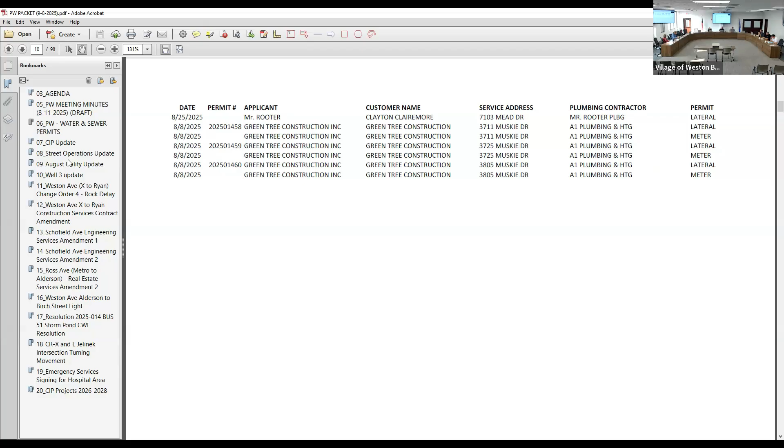Most of these projects are on the agenda in some way, shape or form, but with the weather changing, the biggest item of discussion with all the contractors is making sure we get this done before winter hits. Right now, everything's looking like that should be the case, making sure we get pavement down in October or early November.

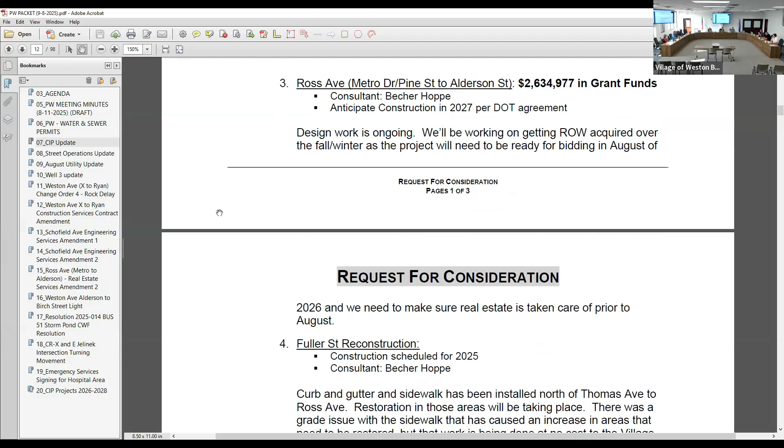For the Ross Ave Metro to Alderson project, we tentatively have a public information meeting scheduled for October 8th. I don't have that on here, I can send that out too. It's not necessarily a public works meeting, but a meeting for the businesses and residents along that corridor to go over the project with them. I think there may even be somebody from the DOT since that one has STP funding associated with it.

Fuller Street project is ongoing. If you walk through there, you might notice on the west side the sidewalk is a little high in some areas, it got put in a couple inches high in some spots. We're looking at the contractor figuring out the method they want to use to make sure everything flows back to the road.

So whether that be having their concrete sub rip out all the sidewalk and redo it, or attempting to restore back a little further into the yards to make sure everything will still flow over the sidewalk. If you go through there, you might notice restoration is a little further back than typical in areas, but that's kind of their choice. Any work over planned quantity for that restoration is at the contractor's cost, not the village's.

Have they found all the bad spots? Are there gonna be areas they'll have to do something else behind there? There might be still, I think there's maybe two where there really isn't. Are they gonna redo the sidewalk? Might be a combination of one of each.

So I think for the most part they can get it to drain across the sidewalk like it should. I thought it looked nice, they did a good job on it, looks good with the curb also. So if you go through there, if you hear something from a resident, that's there, but it's not the village's cost to remedy it.

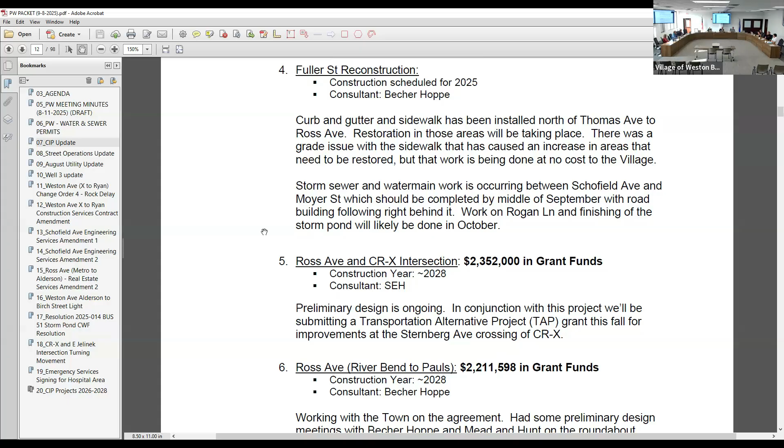If it was up to us, we could just say rip it all out and redo it all, but I think whatever, probably close to 1,000 feet of sidewalk, they probably don't want to rip out. But it should all work, and before we approve it, we'll make sure it is what it should be.

Biz 51 pond, I got that in the packet, but we've got a couple items to get together for the Clean Water Fund loan before the end of the month for that one.

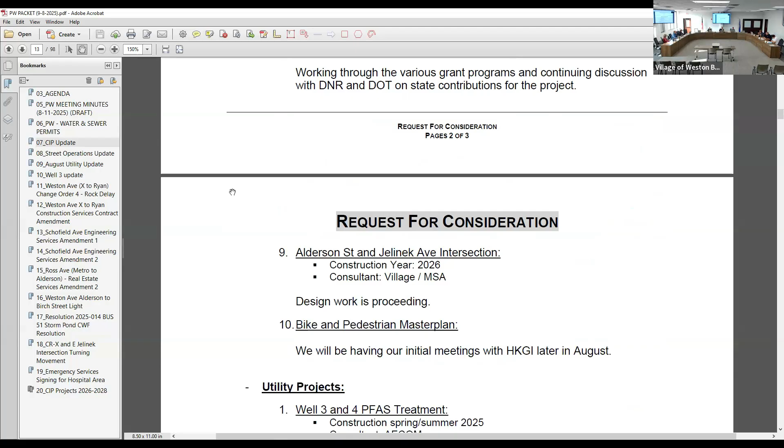And the bike and ped master plan is underway now as of the end of August. We had an article in the newsletter about that, and we'll be working on getting additional information out to the public there.

And then the GAC tanks, well, I won't steal Josh's thunder, I'll let him talk about the well 3 and 4 work.

I added a bunch more information to this table here, and I'll try to, if you have any questions about the projects, just trying to track kind of where we're at with cost to date on them and any special notes. If you've got questions, let me know. Otherwise, any questions for Michael? No.

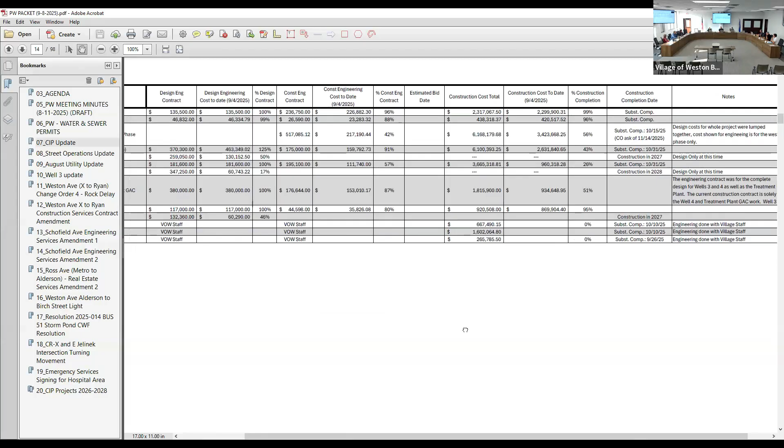Item number 8, street operations update.

First off, we had grading of the gravel roads throughout the village. We also purchased some calcium chloride to mix together and put down for residents on these roads. We applied a coat of calcium chloride for dust control after the roads were graded.

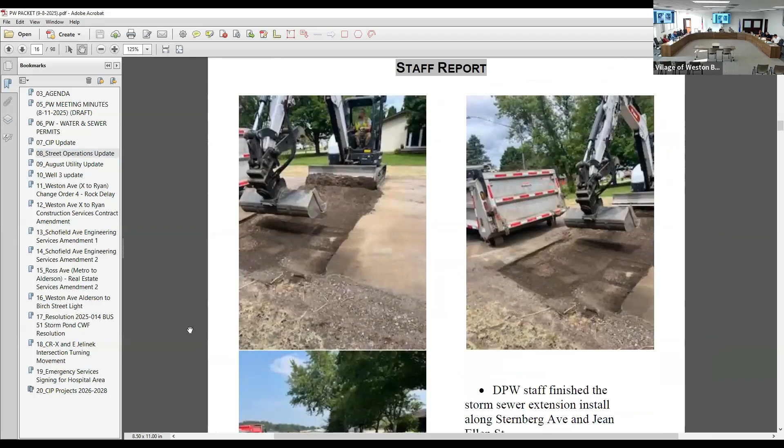We finished the storm sewer install on Sternberg and Jean Ellen, which included putting in 10 Nyloplast storm structures, 1,800 feet of pipe, and reshaping the ditches and hydroseeding everything back in, getting it ready for the overlays.

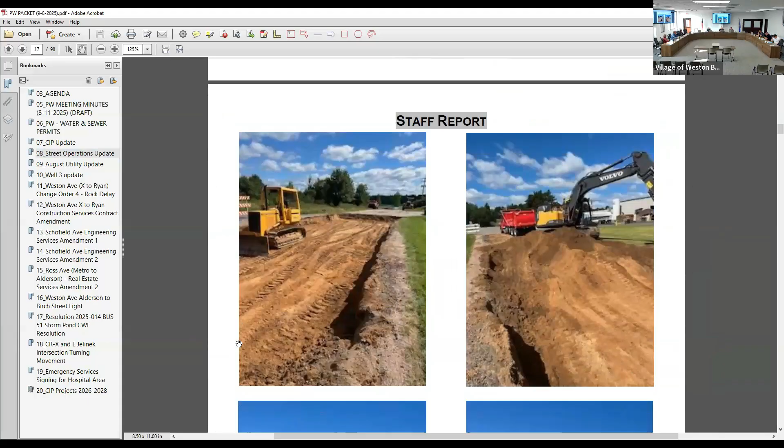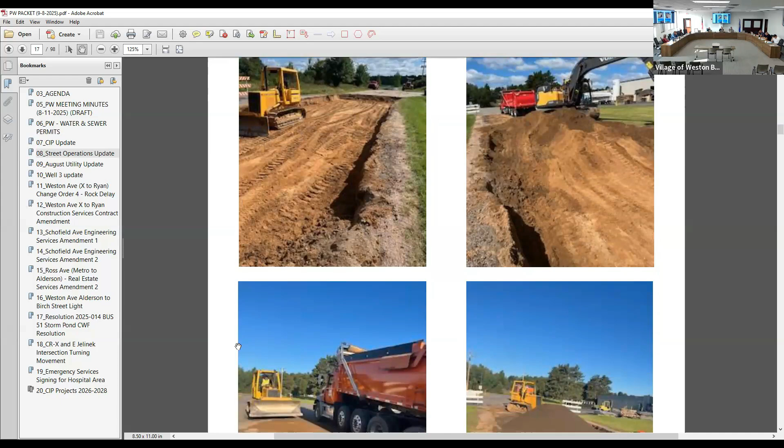We also did an excavation on Meridian Street. The crews excavated 2 feet of material out from the road. The top gravel grade was granite, about 6 inches. Under the granite was about a foot or so of topsoil, but we needed to get a good sand base excavated out, put a sand lift back in, and a 12-inch recycled base course for the grade.

The excavation was about 125 feet long. The reason for this spot was right in front of the business where there's a lot of truck traffic coming in and out, and the road was getting deteriorated pretty bad there.

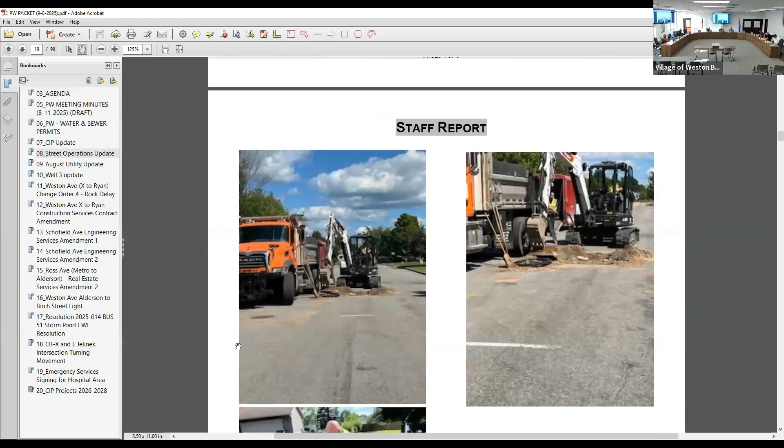Crews are also finishing up on the manhole water valve adjustment overlay projects. They've got 3 guys on it doing all the adjustments. They're doing about 6 manholes a day, start to finish - dig them up, pave them, set them back, and repave them in.

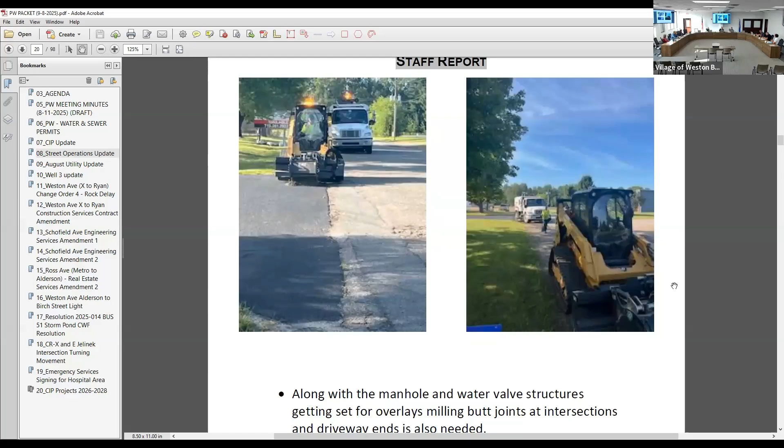Along with that, the crews are also doing the milling of driveways and intersections. Two personnel are involved with that. Millings are picked up with the street sweeper. We also haul those back and it goes right onto our recycled blacktop pile.

We also got some more line painting done, signal painting over off of Schofield Avenue where the GSP was applied. The pavement markings were by the school and the industrial park entrance. They needed to be redone, so staff got that done before school got in session.

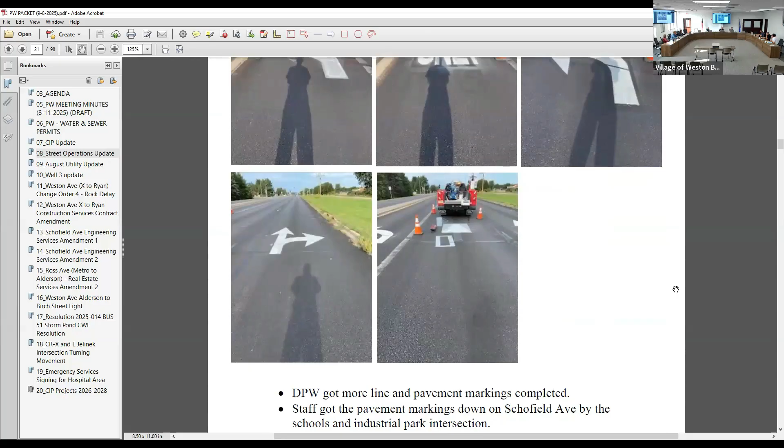And for the shop, all the leaf vacs were in along with the trucks they mount up to for service and repairs. They finished fabricating the plow wing, replaced with thicker steel and gussets for reinforcements.

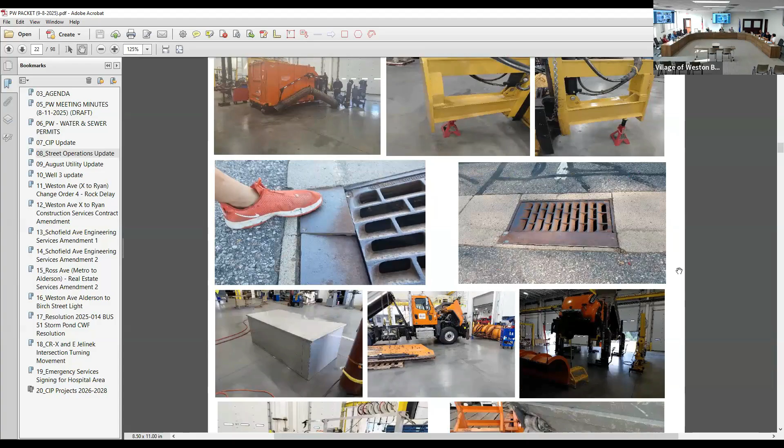We also repaired a cast iron inlet on Ross Avenue. They fabricated a stainless steel box for Schofield Avenue irrigation mechanicals. The box was wrapped in a vinyl flat green so there's no reflection as people are driving by on Schofield Avenue. The old box was rotted out and rusted, so they made the new one out of aluminum and stainless steel.

There was also a fabrication of a rack to put our 8-foot barricades on the truck. It's being mounted to the back of the truck. They're also adding stoplights, turn signals, and emergency lights on it so you can see it, because the signs will be covering up the taillights on the truck itself.

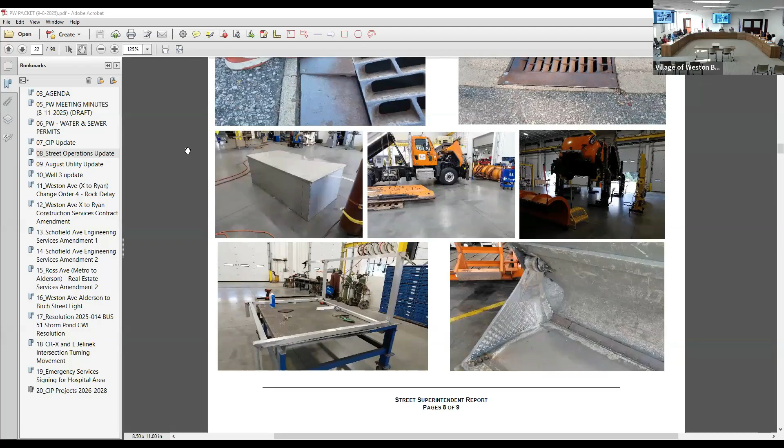They finished up the fabrications on the 4-in-1 bucket. Also, not pictured, they did our quad axle number 90 AT repairs, the Flail Mower drum replacement bearings, number 15 triaxle replaced oil cooler and service, number 38 front end loader service, shop compressor service, and hose reels in the shop were repaired. The overhead crane was inspected by Custom Steel and shop lifts inspected by Waltz Patrol.

That's it. Anything for Forrest?

Awesome. Thank you, and I really appreciate the work you guys do fabricating some of these things. Obviously, if we were to go out and buy a metal box for something, it would be pretty expensive. Yeah, so it's nice that we can do some of that stuff in-house. Absolutely. So, those pavement markings look good. Yeah, I had my drive by when he was doing them, and they look really good. He does a good job on those. Yes, absolutely.

I'll just say the long line painting should be getting done next week, Friday, with Portage County. We've been working with Portage County Highway Department the last few years to do our long line painting, which is at a considerably less cost than some of the private entities out there. So we're doing more of the regular pavement markings - we'll do the specialties, the arrows, the words, the crosswalks, those things - and then the truck that just goes for 2 miles down Schofield Ave, that gets contracted out.

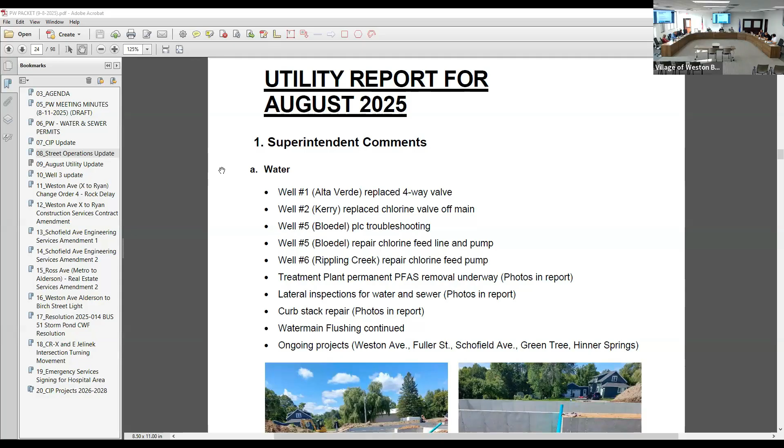We do have a finish line schedule for our well 4 and the permanent tank portion of this project. You can see in the pictures, the tanks got delivered. It was a tight squeeze getting it through the door, maybe about 1 inch or 2 on either side, but we got it in.

The tank outsides were painted. We had some discussions on colors, and green is for our raw water that has not gone through any of the granular activated carbon material. Anything beyond that in the treatment plant will have a blue color.

On the schedule, I believe next week we should have municipal well out to do some of the work on the pumps in well 4. We need a rehab, and the pumps needed to be rebuilt as well. Midweek, the tanks will be getting disinfected, with an anticipated GAC delivery the 22nd.

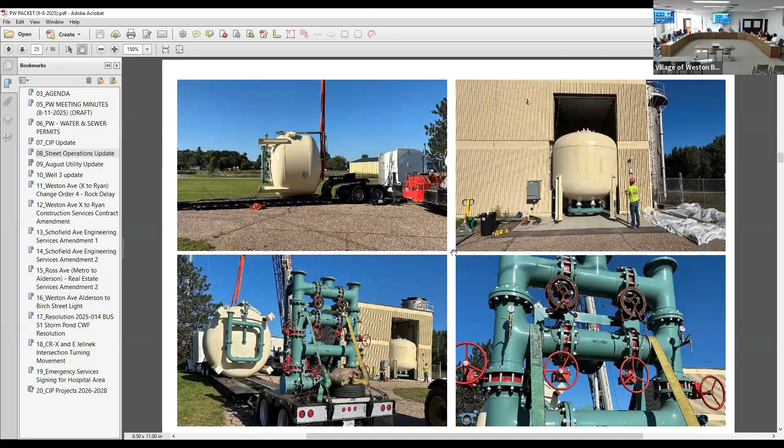I don't believe that's changed since Friday. I didn't get a chance to get out there today to take a look at it. I don't know if we have a meeting scheduled, but I think we'll need one to go over what the startup of this is going to look like, when it's going to be, and what boxes we have to check. I can't remember exactly what the DNR said, but I believe they wanted to come up to be part of something. So we need to get a meeting on the books to go through what the startup's going to look like for well 4.

On the well number 3 side, the bid opening for that portion of the project is tomorrow afternoon, so we'll get an idea of the costs. I don't think we'll be able to start it all this year, but maybe by early winter they could start some of the well 3 portion.

Outside of our treatment plant work, on the water side, a number of lateral inspections are happening for our water and sewer inspections with the guys, along with a couple of curb stop repairs. I included a photo of that as well.

Water main flushing continues. We completed this, I think it was last month, maybe. We finished the east portion of the system, east of Camp Phillips. The guys revalved and are going to be working, heading into the western portion of the village system.

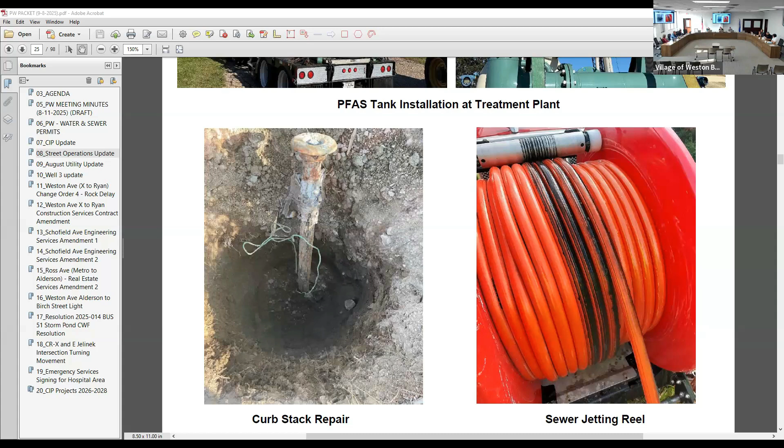On the sewer side of things, we had a demo of a lift truck that we're hoping will work to lift some of our heavier pumps. It seemed to work well, so we'll see what Brian decides on that.

Our sewer jetting continued. I included one photo there of the reel - sometimes when they pull it back, you can get all kinds of different colors as you're cleaning out the sewers.

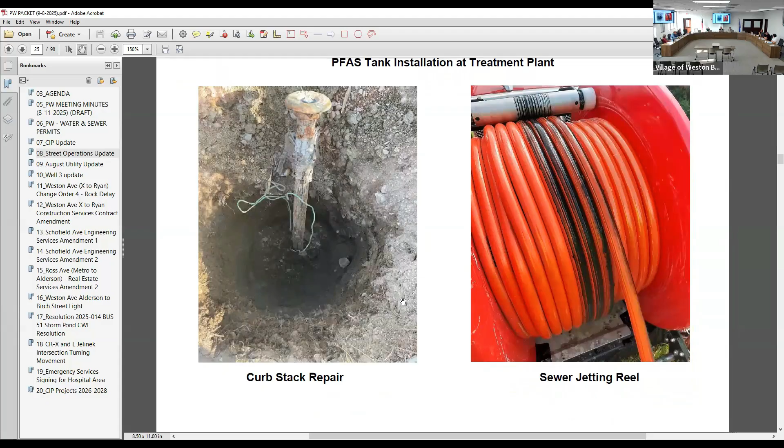We did our regular maintenance, collecting some of our pH data, cleaning our bad spots, and maintaining some of our generator stuff.

For the SCADA project, we had some final meetings with the designer and implementer. We got a draft site report from the designer and we're going to go over it to see what other comments he had, and see if we need our implementer to do anything in addition. It seems most stuff is functioning as we expect.

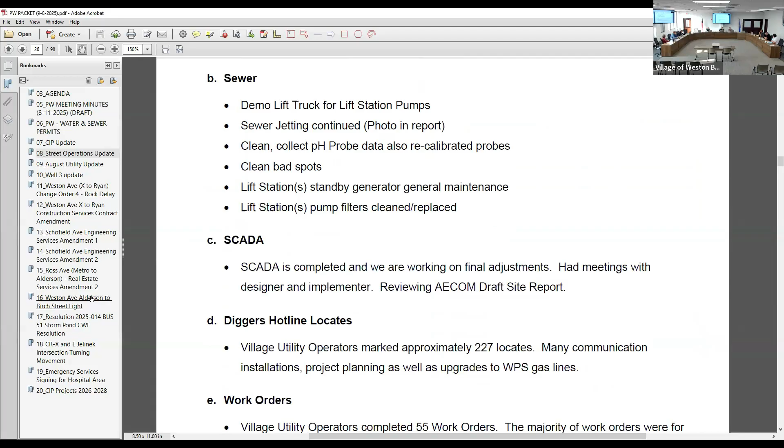Locates - still a bunch of them. Work orders - still a bunch of them, on our contract side of stuff.

Part of our PFAS project - we had submitted a couple, not claims, but as part of our class actions with 3M and DuPont, we got our second payment. It was just over about $850,000 for the second deposit into our account. We haven't heard yet on the other one.

Who's the other one? 3M? Oh no, so that was 3M, 3M, DuPont, and then we haven't... BASF and Tyco. They haven't finalized the BASF and Tyco ones yet, so we don't know exactly where that's going to be. It won't be quite as much as this, I assume, but we haven't heard anything on that.

Yeah, so those are just the 3M deposits. So the first deposit was 3M, this was just the 3M, so we still have fully whatever we're going to be getting from the DuPont portion, and then in addition, whatever they finalize for the BASF and Tyco. So hopefully lots more to come for us.

Well, 7 and 8, I could probably take that off of here. It seems to be running. I hesitate to take it off. Otherwise, we're going to jinx ourselves here.

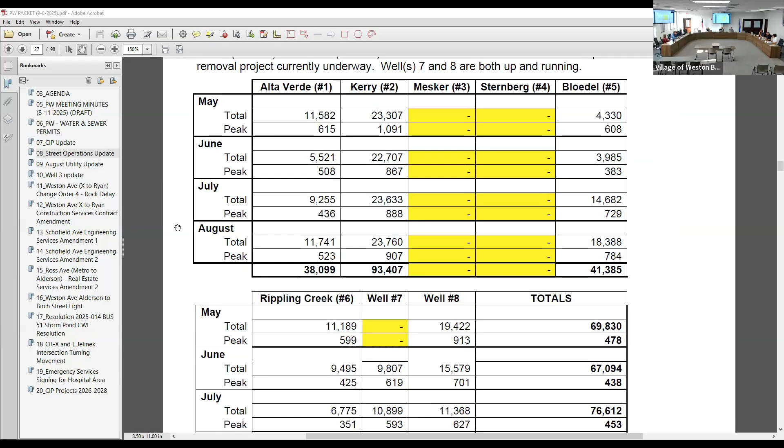I did mention our SCADA project, mentioned the street stuff. I guess the only thing in addition to what I haven't spoken about already is UCMR 5, our second round of samples were collected. Since wells 3 and 4 are off, we couldn't collect those samples. We do have a 5 to 7 month window though to collect any additional sampling for this UCMR 5. So I'm assuming we'll be able to grab something from well 4. I'm not sure well 3's project is going to be done in time to hit the window for the sampling period, so that one might not be included with the sample information. And then beyond that, we have our customers added, our water pumped, wastewater flow data, and our lift station information.

Any comments or questions for Josh?

The money that we are being allocated from the settlement, is that, I guess, being allocated toward anything right now, or is it just going into an account until we... Yeah, I think Mike can speak on it, but now that we're getting our tanks in and we're going to have our first purchase of our GAC material, we'll start being able to see what it costs to get new material, what it is to dispose of material.

So I think we're hoping to utilize it for that. In talking with Jessica, I was trying to create our own designated PFAS account so that, because there will be additional treatment costs for media disposal and new media fills, the goal would be to keep that money in its own account, and hopefully there's enough where we can earn interest income on it so that it can hopefully, maybe not 100% pay for itself, but it can maybe last us the next 20, 25 years, versus spending it right now and then all of a sudden we have to say, oh whoops, now we need to go get a rate increase because our operating costs are going to be higher. So I know she was looking into what some of the PSC rules are on that, to keep money aside for operations, because you have to account for your operations and that's how your rates are determined. So she was going to see how to make it so that this fund is for this part of operations, instead of the PSC looking at our report and saying, hey wait, something seems off.

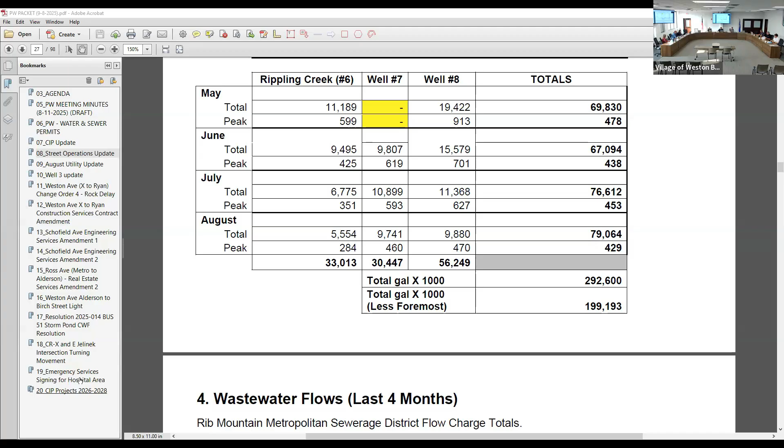We'll go on to policy discussions and recommendations. Item number 10, well 3 iron, manganese and PFAS treatment project bid status. Can I make a slight ask that we move number 19 up? Sure. Okay, yeah, let's jump to item number 19, emergency services signing for hospital area.

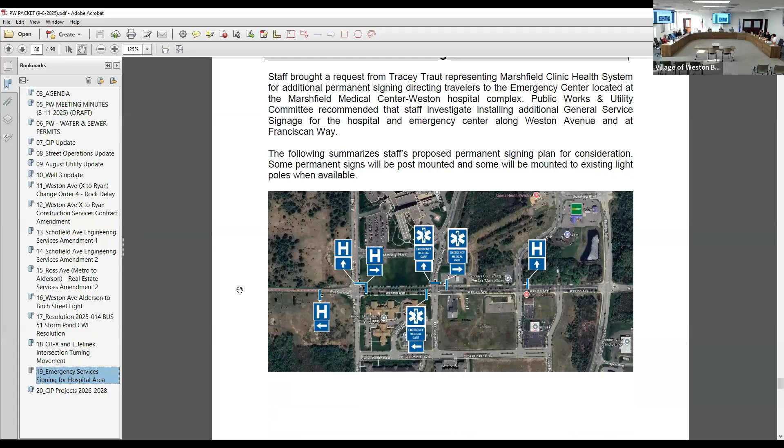So it's kind of a follow-up from last meeting, and Ike wasn't here at the last meeting. He's the one that's been in main contact with the hospital area, so I know he put this schematic together. I want to make sure that's the way the committee was thinking we would sign this, or if there's other thoughts.

Yeah, so essentially whenever Marathon County did improvements on Camp Phillips, they threw up a hospital sign just off the intersection of Weston Avenue and Camp Phillips. After that, there's no more after that point.

So reading or listening to the recording from the last meeting, it sounded like they may want us to take a look at adding additional signs. This is just a preliminary draft. If we want to take some out, we can just leave the emergency ones that were the original ask.

Once you get into the complex, like Michael mentioned during that meeting, there are wayfinding signs that Marshfield Clinic maintains on their property along Ministry, Cranberry, and Birch, showing people where to go. It's just coming in off of Weston Avenue. There's not much there, so this is just showing either direction.

For example, on the left side there at Birch, straight in going to the hospital, and right and left turns from either direction. Then when you get to Franciscan, right or left turns, along with a sign at that intersection saying straight in is the emergency service area. And then just one advanced sign at Stone Ridge saying hospital straight ahead.

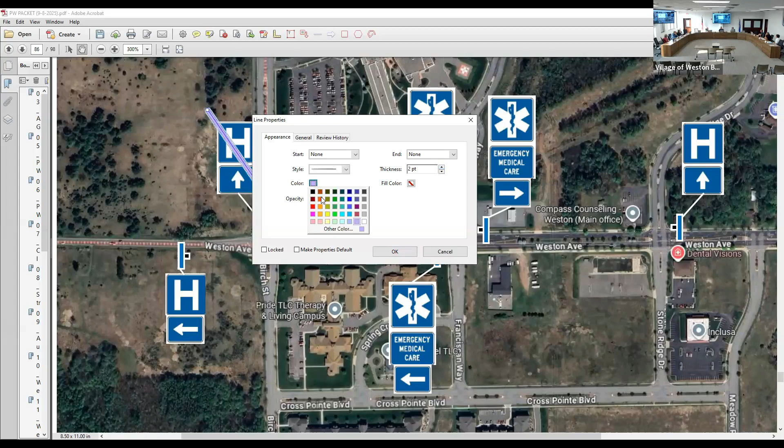And the biggest problem with signing is when they go up, everyone sees them, and after that, they ignore them. Drive around the village, we got thousands of signs that say children playing, you see it one time and it just seems like almost too much. I think we got rid of all the children at play signs, actually, we just had that conversation. I don't have any of those.

So Tom, you're saying get rid of those two, correct? Yeah, I wouldn't think those, I mean, yeah. Somebody, if you don't want them on at all on Weston Avenue, the emergency ones, I think are right where they should be. If anything, that one that goes up Franciscan could go a little further to the north maybe, but still, I think those are fine.

I would almost argue, and obviously we can do whatever we want, but I would almost argue that the one that's on Weston to the west of Birch is somewhat unnecessary as well, because you're gonna end up reaching that next intersection regardless if you're coming eastbound, and from there you can see the hospital, and you should be able to see some of these other signs as well. So I get the one on Weston Ave to the east there because it's a little bit longer of a stretch, and somebody might come off and be like, I don't see a hospital, I don't see anything. But then once they get to that next intersection, there's the 3 EMS or emergency medical care signs, and from there it should be pretty obvious where you need to go.

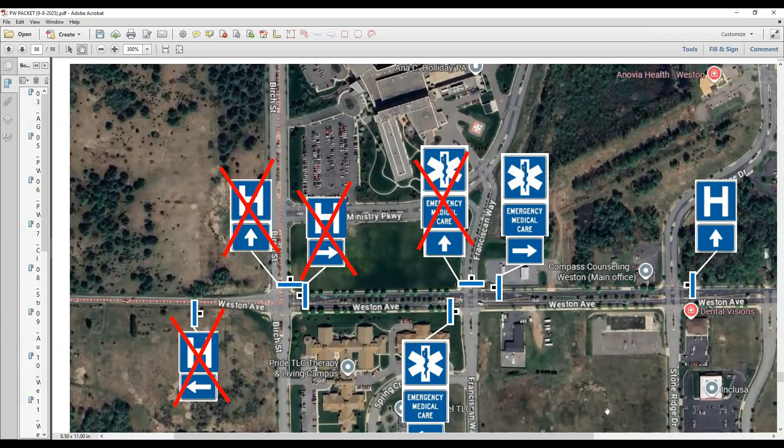I'll recommend the village board proceed with the revised permanent signage layout for around the Marshfield Medical Center in Weston. I'll second that motion. Any discussion? All right, all those in favor say aye. Opposed? I'm sorry Joe, was that a yes or a no? That's an aye. Motion passes, and I'm an aye on that as well. Thank you, all right, that was item 19.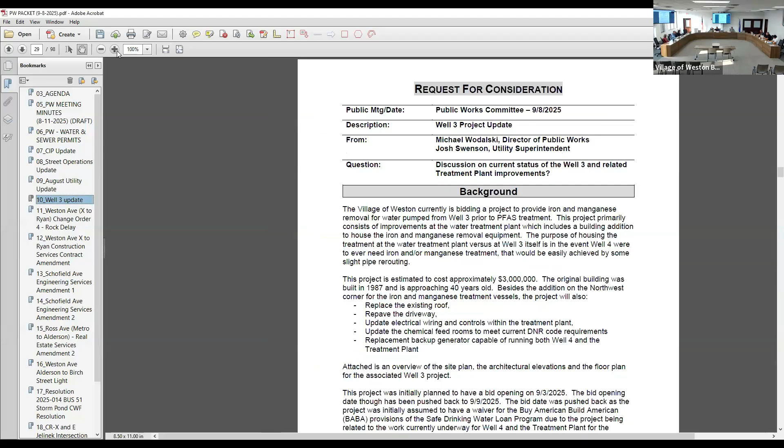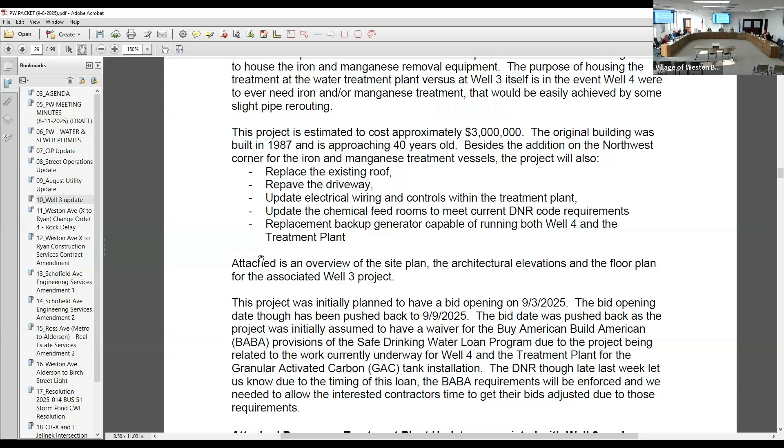Item number 10, well 3 iron manganese and PFAS treatment project bid status. As Josh alluded to, the well 3 bid opening is tomorrow. It was initially scheduled for a week ago. There were some items that came up late during the DNR review, where we thought we were still able to work under a waiver we had for the Build America Buy American provisions of the Safe Drinking Water Loan that we currently have for the well 4 and treatment plant work. However, the DNR got back to us late last week saying their interpretation of the rules is that we are not able to request that waiver, so those Build America Buy American requirements will be enforced. So we need to allow the contractors more than a day to update their quotes, and those bids are due tomorrow instead of last week. But I thought it'd be good to go over the building itself and its purpose. We refer to this as the well 3 work, which is a little confusing because all the work for the most part is taking place at the treatment plant.

But it's to treat the water from well 3 for iron and manganese, which is required prior to the GAC treatment for PFAS removal. So long story short, that's why we had to take well 3 out of the well 4 and treatment plant project, because we had to prove that iron manganese was part of the PFAS treatment cycle in order to get the emerging contaminant funding, which is why we thought the waiver was still applicable, but the DNR said no.

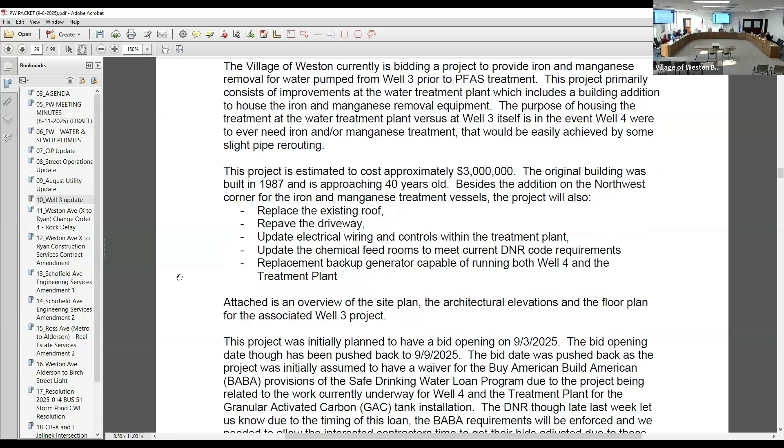Overall, the work at the treatment plant for well 3 is expected to cost about $3 million. This building is nearing 40 years old, and we'll have an addition put on the northwest corner for iron manganese treatment vessels. Along with that, we're looking at replacing the existing roof, repaving the driveway, and updating a lot of the electrical wiring and controls within the treatment plant. Some of it no longer meets current code, so we're getting that electrical area into its own room instead of within some of the other working areas of the facility. We're also getting the chemical feed rooms up to code, and then getting a backup generator that would operate both well 4 and the treatment plant.

So I guess the fun part, as far as the site goes - I don't even know, I probably should include, does everybody know where the treatment plant is? I probably should start with that.

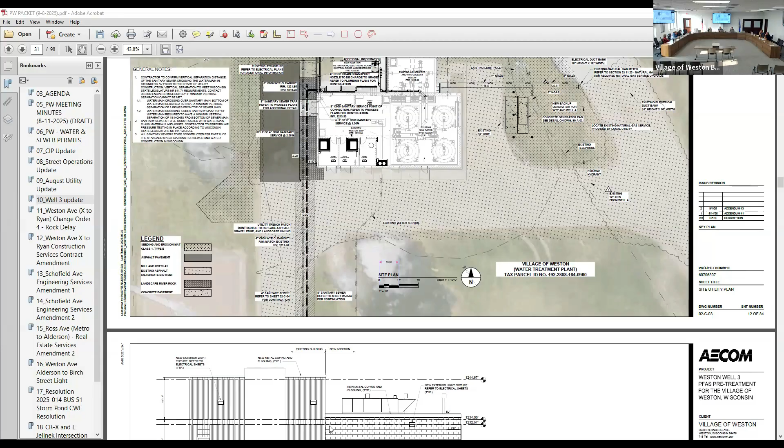So within the facility, in the existing space, these 4 tanks here represent the granular activated carbon tanks, which are currently getting installed. Here we have an air stripper that was installed back in the 80s for VOC removal, volatile organic compound removal. And then this was kind of the chemical feed room. We had all the SCADA controls, electrical controls, as well as an office in a room here.

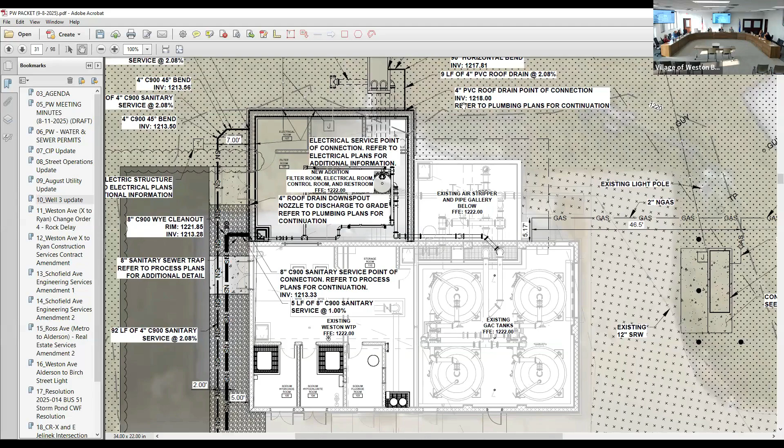So as part of the updates, we'll be adding this northwest corner onto the building to house the iron manganese removal, which I guess zooming in on that - we've planned for 6 vessels initially there. 4 of those, or all 6 of these, are from the temporary treatment we had for PFAS, or do we have 4? I think we had 4. We have to get 2 more.

So then we'll add a restroom there for staff to use if they're there. The control room and electrical rooms will be separated now. And then the rest of these chemical feed rooms will be updated to meet current DNR requirements, with the carbon tanks over here.

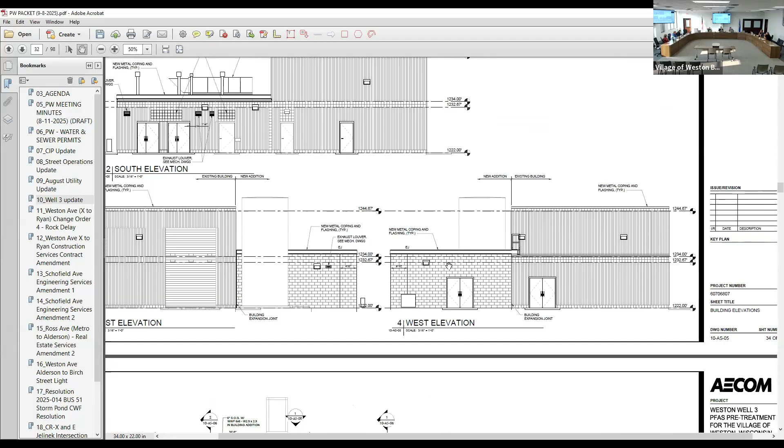And then, as an elevation or architectural view, it'll still be kind of a brick facade, sticking off the west end, trying to match that lower roof line that currently exists, as it is a 2-tier. So from the front, there's not a whole lot - we have a couple louvers and airflow additions, but for the most part, that roof line is staying the same on the south side. Then from the north, you'll see the bump out added, and on the east and west elevations, you'll see the brick building jut out there.

Oh, I don't know if there are any other questions.

Boys, this will come back at the next meeting. Yeah, we'll at least get the bid results. I'll see how quickly we have to turn it around for the safe drinking water loan. We might need the board to take action on bid results.

But we will be submitting the safe drinking water loan for the emerging contaminants portion. $3.5 million is generally what's been allocated to all municipal utilities for PFAS removal. The well 4 work currently should leave us with still probably about $2 million worth of the principal forgiveness there for that work.

So you didn't need anything else from us today? No, just figured I should let you know what's going on. Any other comments for Michael on that one?

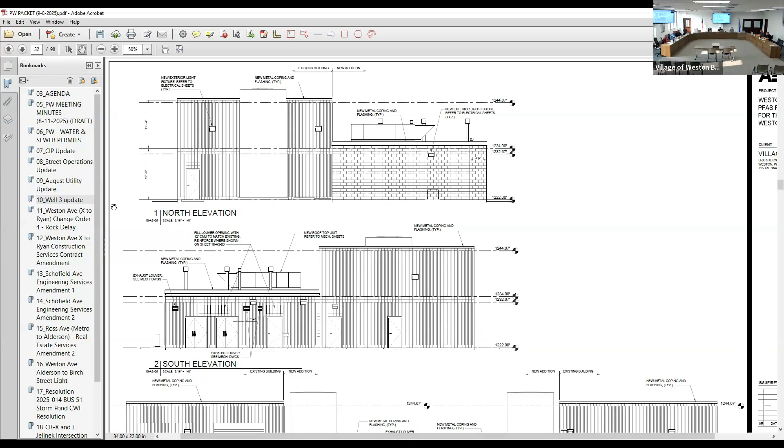All right. Item 11, Weston Avenue, Highway X to Ryan, construction change order number 4.

So this is the construction change order for a time extension for integrity grading excavating on the Weston Avenue project. Kind of a summary of the previous change orders, which are generally more for material type or construction methods. This one is an ask of a time extension due to rock that's been encountered, primarily with the sanitary sewer installation.

You know, you try to plan ahead and get borings ahead of time. And it seems like most of these rock shelves are starting within 50 feet of where one of those borings was, but we didn't quite hit it. Then it goes for a couple hundred feet and stops short before where the next boring was. So they've hit 3 spots.

The first one they kind of dug through. The second one, they had some Swiss cheesing, or drilling, of the rock. And this third spot they've hit really hasn't been something they've been able to get through. Their production has dropped to maybe 20 to 40 feet a day as they try to chisel through the rock, versus about 300 feet a day when there's nothing in the way.

So I guess in reality, this would be a differing site condition. I don't know if we have much contractually where we could truly deny it. But I mean, they have been trying to work through it as best they could.

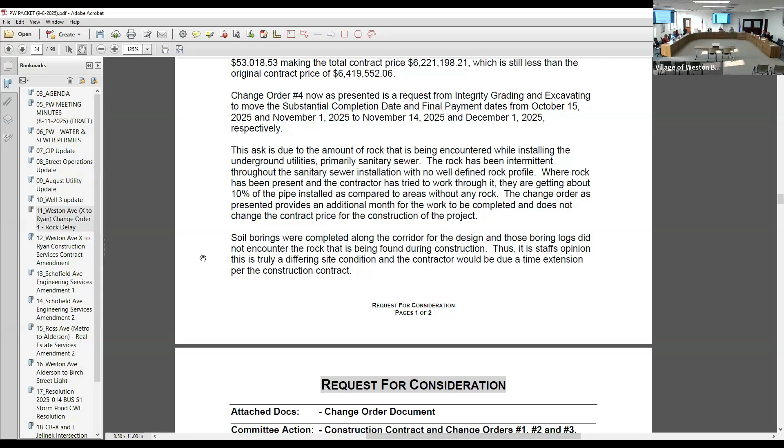Discussion? Do I have a motion? So moved. Motion by Fred, I'll second. Second by Tom. Any discussion? All those in favor say aye. Aye. Aye. Aye. Opposed? Motion passes.

Item number 12, Weston Avenue Highway X to Ryan Construction Services Contract Amendment.

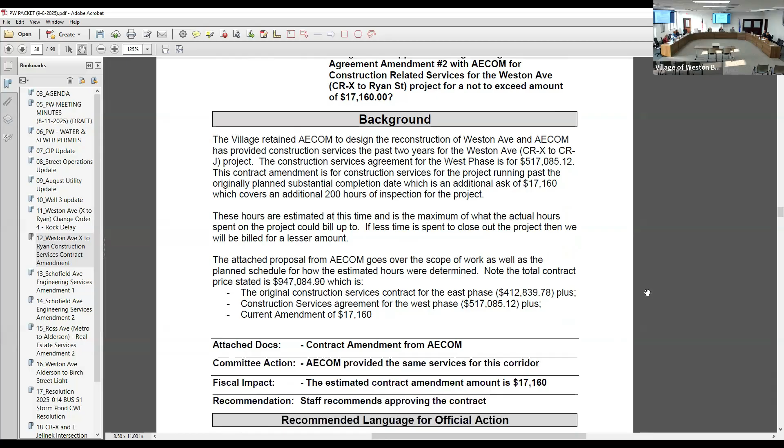All right, so this is the agreement we have with AECOM, who is our on-site construction inspector for the project that is going on out there. So with the project looking like it's going to go past its original plan date, there is an additional ask of essentially 200 hours of inspection to cover that additional time. So that totals $17,160, essentially for 4 weeks, kind of estimated at about 50 hours a week.

Any questions? Do I have a motion? Well, hang on a second. Michael, is that for one or two guys that are out there? Yeah, so they have one full-time person, and then as second crews have come in, they've added a person as needed. So at some points, they've had up to 3 pipe crews and a grading crew on site all at once.

So the 200 hours then, when the extension is only 4 weeks, is assuming that there's going to be 2 guys part of the time because of the additional crews on site, or the number of sites to manage? Correct, yeah, it's roughly a mile of roadway. Okay, all right, I understand. Any other questions, Joe? Nope, I'm good, thank you.

Do I have a motion? Your turn, Joe. So I move to recommend the village board approve the engineering services agreement amendment with AECOM for construction-related services for the Weston Avenue reconstruction project from County Road X to Ryan Street, for a price not to exceed $17,160 due to the time extension on the contract for rock excavation.

I'll second. Motion and a second. Any other discussion? All those in favor say aye. Aye. Aye. Motion carries. Item 13, Schofield Avenue Design Services Amendment.

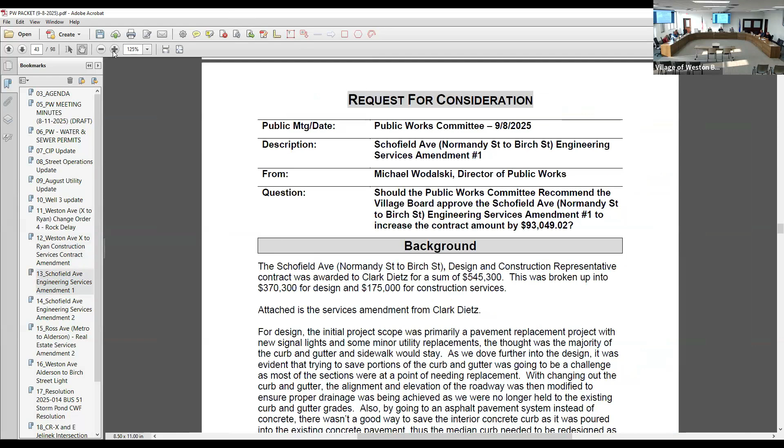All right, so this is one we discussed a little bit last month regarding the design changes on the Schofield Ave project and associated cost on the design there, where that was the change in scope from a pavement replacement project to moving to a full curb, gutter, sidewalk redesign for a good chunk of the project there. New curb for the entire length of the project and new sidewalk, mostly on the north side, and then driveway apron grades and those alignments.

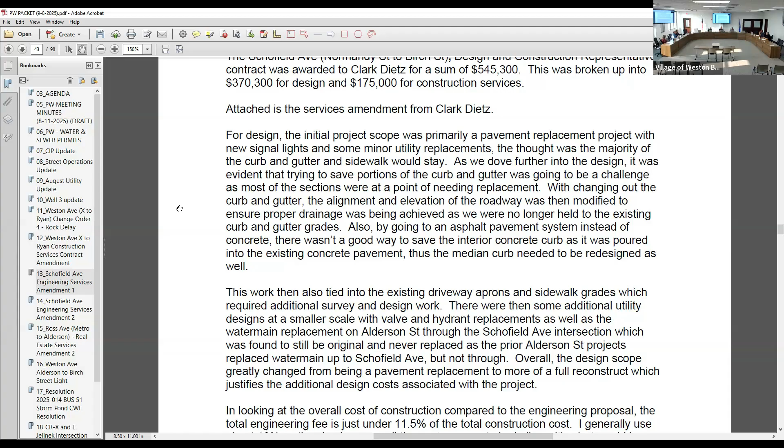I guess then we also added some additional utility work for water main replacement through the Alderson Street intersection. So there was a design scope change from what was asked for in the original request for proposals as compared to what the final product was.

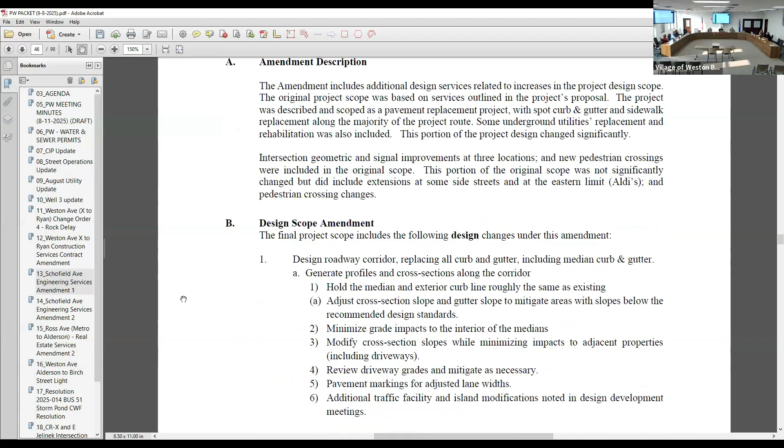Trustee Zagami had asked for some of these things to be broken out, which I think we did get a little more elaborate breakout of some of those changes. So, any questions? Yes, go ahead.

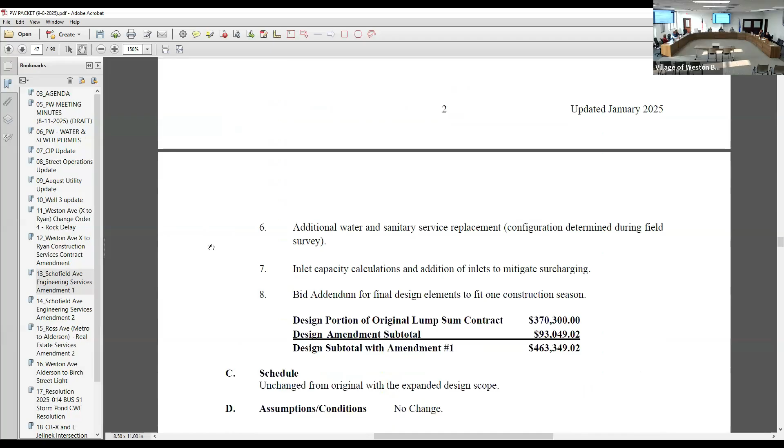You looked at the amount, it seems reasonable to you? For the amount of work required and the scope there, as I said last month, when I looked at what some of the other proposals we received initially were for, it's actually kind of close to what the current ask is, but a lot of those had mentions of curb and gutter and cross sections and additional work that wasn't asked for initially.

So if we would have stuck with just zipping out the concrete pavement and putting down new pavement, that would have worked well. It was just as we got into it, we had 10 feet of good curb, 10 feet of bad curb, 20 feet of good curb, then a few spots like it, trying to figure out how do we patch that together, how do we make that work. It just didn't seem to fit what we should do.

And then the other issue was the interior median on Schofield Ave, the way it was tied into the concrete pavement. There really wasn't any good way to salvage that without trying to saw cut the entire length of the project. Aesthetically, that probably wouldn't have looked great. Functionally, it probably could have worked, but it would have been tough to do. So I think the amount of effort to get to where we were, it does seem reasonable.

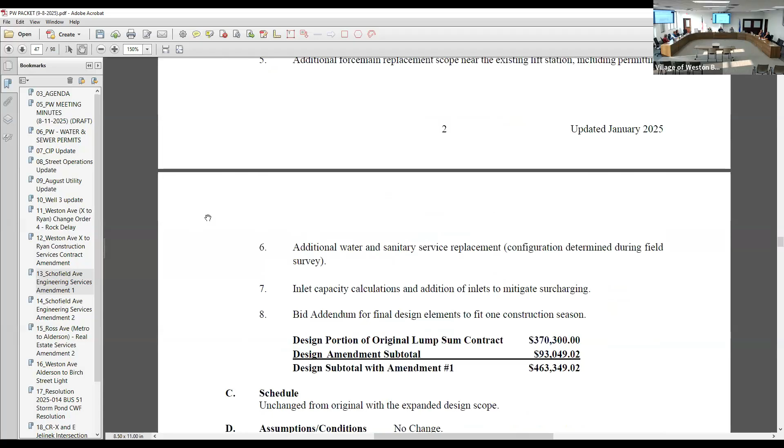I may be missing some of the previous discussion on this, but so the changes that were made through this project, are these changes that we requested to be made from what we originally requested? Correct, yeah, like I said, we asked for a proposal for a redesign of Schofield Ave as a pavement replacement project with some new traffic signals.

Essentially the gist of the project, even looking back at one of the addendums, I responded with there's no expectation that sidewalk is gonna change except for curb ramps at intersections. As we got into the actual design, we got the survey data and they start saying, do you want to save any of the curb? I think the first part of the discussion started with how do we save the interior median curb. As we dove into that, it was like, oh shoot, I don't know if we can save the interior median curb. And then it was, well, do we still save the exterior curb, the outside lanes?

And you start looking at that and you've got good and bad curb all together, tied together. So how do you... in hindsight, I wish I probably would have had about another 3 months to scope the project out, and I would have realized initially, shoot, there's really no worth saving this curb, and just been realistic with that. It was kind of a hope that we could keep this to a minimum of just pavement replacement, and in reality, that wouldn't have been a project I think we all would have been happy with the end product on.

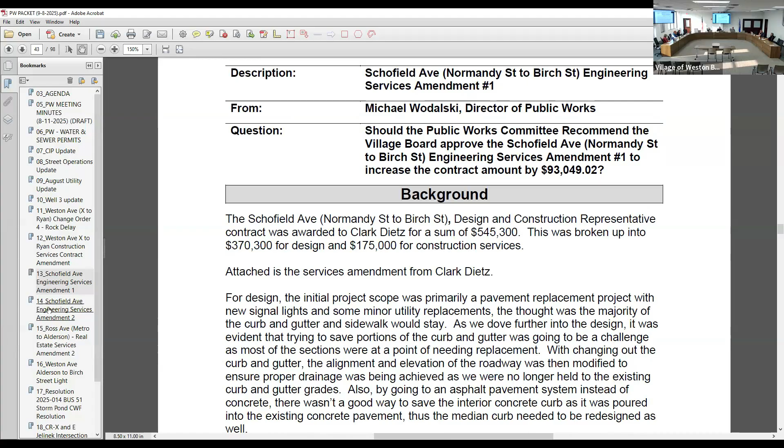All right, motion from Joe. Do I have a second? I'll second. Second from Tom. Any other discussion? All those in favor say aye. Opposed? Motion carries.

Item 14. So this one kind of follows the last one a little bit, but at the same time, maybe slightly different. So when we ask for proposals, in order to get kind of an apples to apples comparison, we estimated a 22-week construction schedule for in-house management, number of meetings, things like that, and then 1,320 hours of on-site inspection.

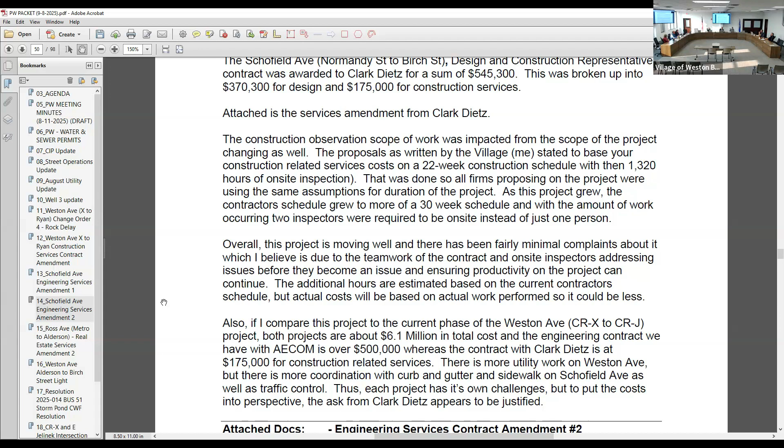So that's kind of a carte blanche assumption when they give us their construction services number for the project. In reality, this wasn't a 22-week construction project. We're looking at a 30-week schedule.

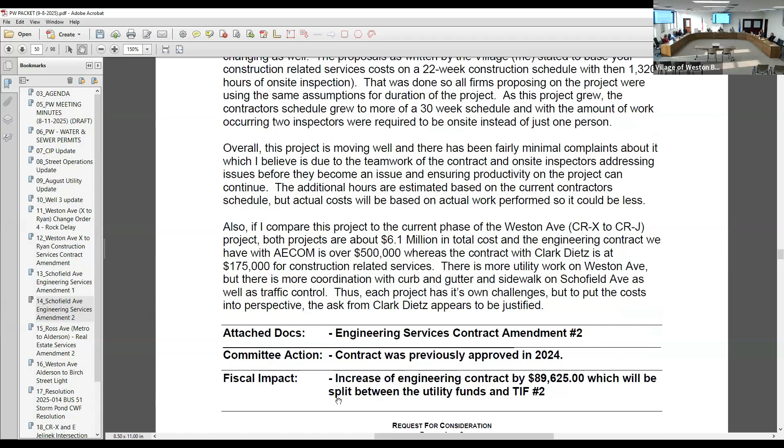And maybe a little bit similar to Weston Avenue, with the increased scope, there has been a need at times for 2 people to be on site, and there probably will still be times where we might need 2 people on site moving forward. So as I looked at some of our other projects, when I put that table together, which was kind of nice, this is a $6 million project, and the current construction services contract of 175

is less than what we have for Fuller Street, which is a $3.6 million project. Von Kanel, East Jelinek was 2.3, and we are 220,000 for construction services there. So this is a much more involved project. Weston Avenue, the $6.1 million project, has a $500,000 construction services contract.

They're on number 14. Valerie, mute, please. Thank you.

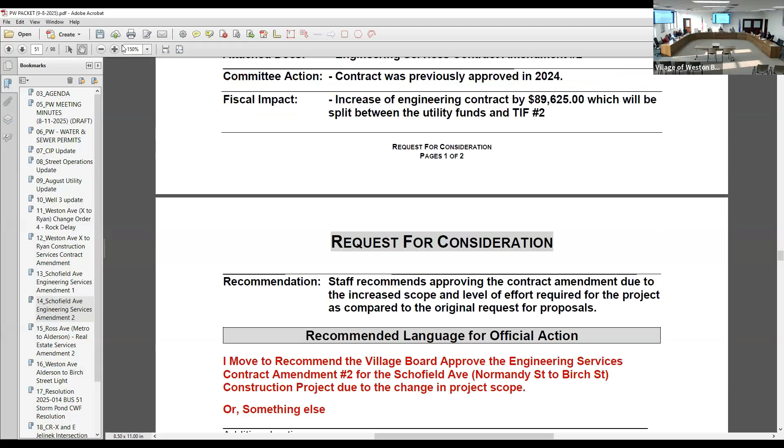Great. Did you have anything else, Michael? No, and then this one, again, they did break out kind of the hours and how their estimates and costs came together for the further duration of the project.

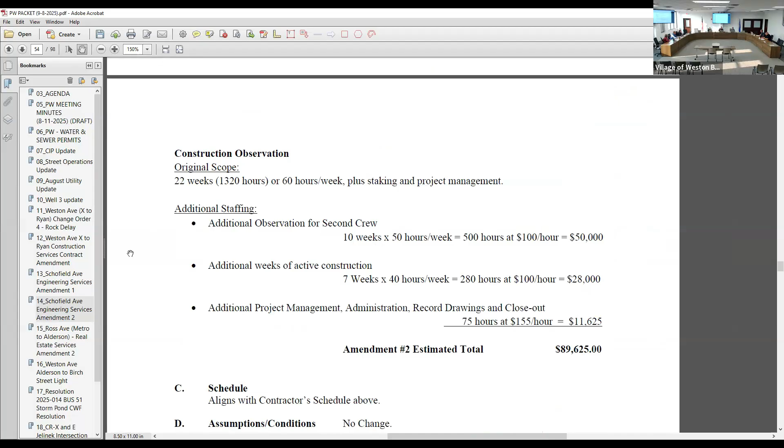Any questions or comments? Do I have a motion? Joe, if you want to make that motion, you have to unmute. I'm sorry. Can you hear me now?

Yes, thank you. I move to recommend the village board approve the engineering services contract amendment number 2 for the Schofield Avenue construction project due to the change in project scope. Motion by Joe, second by Fred.

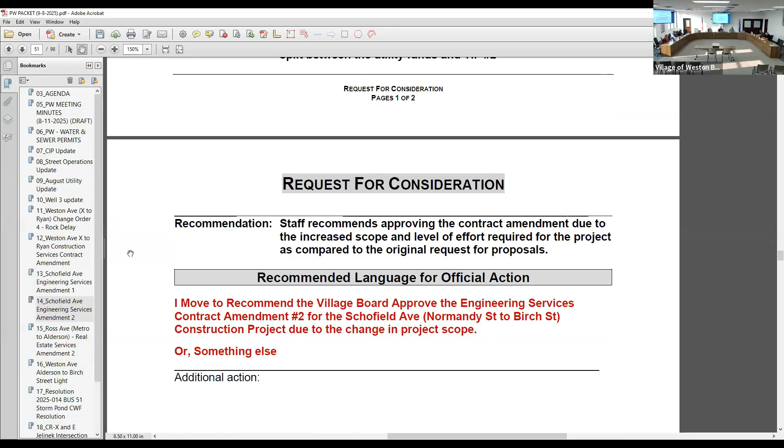Any other discussion? So my only comment on this, Joe, is that to really try and keep this from happening again in the future would be to learn from the experience we've had here, and the need to get something to the finish line without really being able to spend the time to really look at it.

It's hard for me to feel good about this stuff, other than the fact that the guys that did this for Michael probably grossly misunderstood what we were really asking for. So I guess it comes down to a communication thing, trying to make sure that everybody's on the same page.

Yeah, I'd say it wasn't necessarily a miscommunication. I asked for something thinking that the project was a simpler project than what it ended up evolving into. Sure. So like I said, that was more of a scoping issue of really diving into it and making sure that we had everything covered.

And it kind of snowballed. Once you start making one change, it creates a domino effect where three or four things change now because you changed that one thing. But yes, definitely a lesson learned.

Yeah, and I think in general, we've seen that with a few projects where there's things that certainly we can't predict, like having thick rock in the way of our utilities. But then some things where we can maybe just make sure we're taking our time when we're reviewing the item to make sure we're thinking of all the things that could be affected. But in the end, we needed the work done and work was done, so.

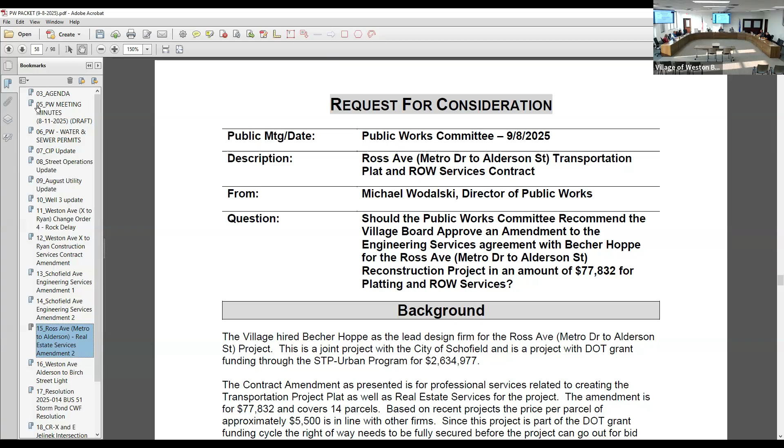So this was for the joint project with the city of Schofield. Becher Hoppe's been working on the design project here as part of our STP Urban program. This contract amendment is for the right-of-way services, so the purchase of right-of-way and the creation of the transportation project plat, so that we can get all those easements and land acquisitions at the intersections taken care of.

This project is part of the DOT grant funding cycle, so before they allow you to bid a project out, you have to show that you have all of your right-of-way secured. So we have to show that we have that ready to go by, I believe, August of 2026, which is our plan spec and estimate deadline. The project will then be bid as part of the DOT LET package in November of '26 and start getting built in spring of '27.

We have 14 parcels as part of this. As I look through it, that cost is comparable with what we've paid in our recent projects along Weston Avenue, whether that was the joint project with Rothschild or the other one between X and J.

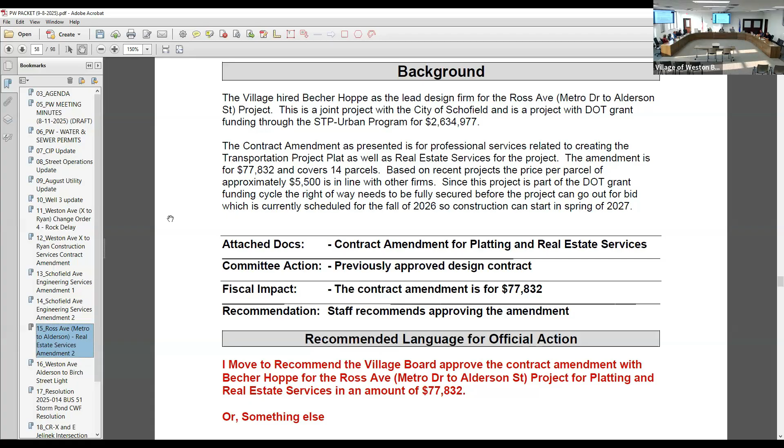All right, any questions or comments? One question I have, Michael, is so these parcels are all parcels that are in the village of Weston, not Schofield? Correct, yeah, we have 14, I think Schofield has either 13 or 15, one of the two, so there's just shy of 30 parcels total for the project.

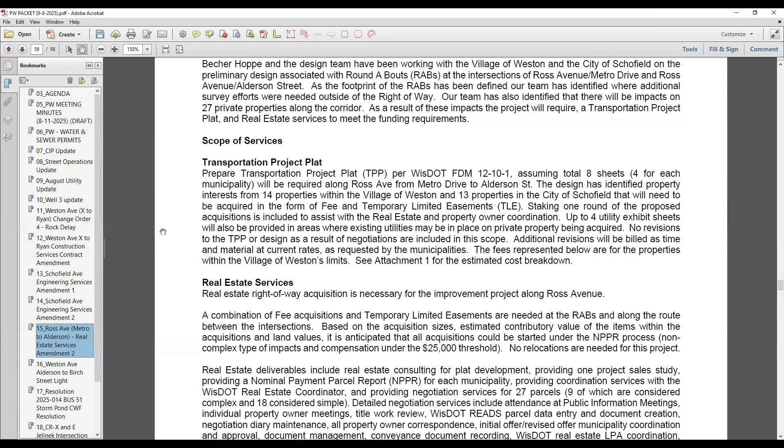Anything from you, Joe? So I was just trying to understand how many lights are actually going to be added then? This one's the real estate one, number 15. Oh, I'm sorry. No, you're good, about the right-of-way acquisition. Okay, yep, I got it.

Any other questions or comments? Otherwise, I'll take a motion. I'll make a motion to recommend the village board approve the contract amendment with Becher Hoppe for the Ross Avenue, Metro Drive to Alderson Street project for platting and real estate services in the amount of $77,832. Motion from Tom. Do I have a second? Second from Fred. Any other discussion?

All those in favor, say aye. Aye. All those opposed? Motion carries. Item 16, Weston Avenue, Alderson to Birch Street, street lighting.

So there's 13 parcels in Schofield, 14 in Weston on that project. Okay, 27 total. Now, number 16.

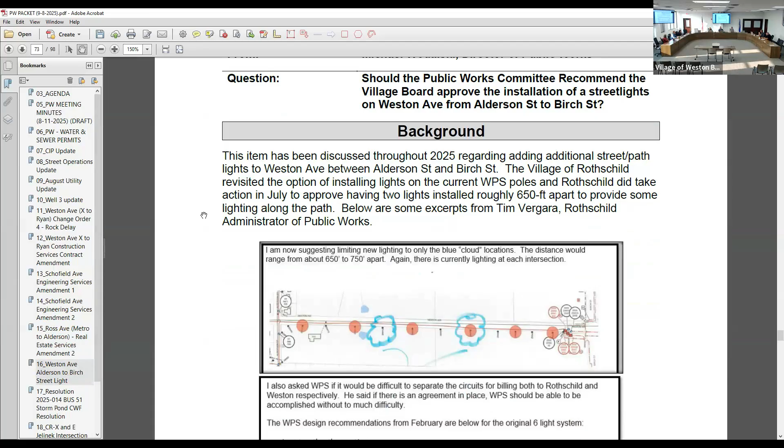Last month, in late August, I was contacted by Tim Vergara at the Village of Rothschild, saying that they've relooked at the lighting between Alderson and Birch Street. Their village board came up with putting lights on these two blue poles that would be in these blue clouds shown here. So there would be two lights added between Alderson and Birch Street. One would become Weston's light and one would be Rothschild's light.

So it's probably a little less lighting than what we'd typically use looking at our village street lighting policy on corridors. I think we use about 520 feet, or one-tenth of a mile, per light, or at intersections. Right now there's no lights there, so this is closer to what our light spacing would be if we were doing it ourselves.

I'll make a motion to approve that, simply because I used to go to the hospital at 4:45 in the winter. I volunteered there and almost hit a deer four times, and I think a little lighting in that area is probably a good idea. This isn't going to illuminate the road though, it shouldn't.

So I think that's the two options. With the 6-foot arm, which is what they had, it might get light across the road, but it's not going to light up the whole corridor, no. It's basically trail lighting. People are going to use it when it's light at 5 in the morning in the summer, and it's dark at 9:30 or 10. To me, I think it's kind of a waste myself.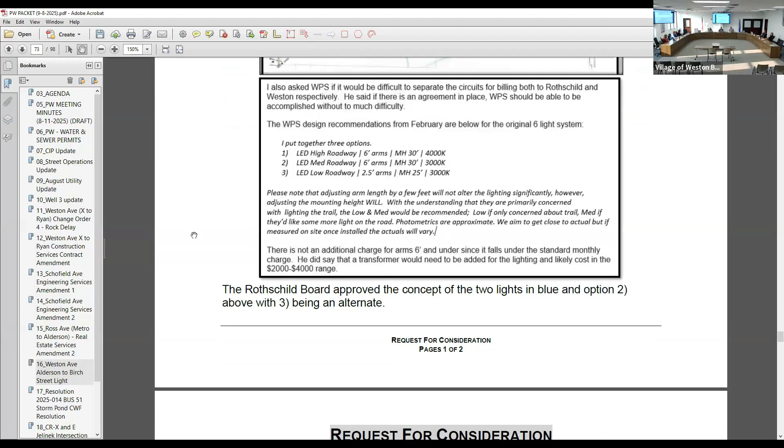We did ask Rothschild to pursue this project, as it was going to be TIF funded for us and it wasn't in their capital improvement plan. I mean, so maybe there's a small concession of adding - one street light is one street light. We asked them to pursue the street project.

The street project, yes, between Alderson and Birch, reconstructing that, was a Village of Weston ask. Probably going back almost 4 or 5 years ago, knowing that we had a limited time frame left for TIF funding, and this was a project that we were interested in pursuing, so - for what that's worth, just trying to be a good neighbor.

I understand the light part, trust me. I know they've been on this, because I thought we shelved this thing a month or two ago. Yeah, I did too, and then - I got contacted back, asking that we essentially entertain adding one light, so.

Yeah, and I think part of the reason it got shelved is because they weren't really getting back to us about the lighting options we had discussed.

I had looked through the Rothschild packet and they use this example of Madison along the hospital corridor there. But that path is completely unlike this one. That's on the other side of some railroad tracks along the hospital, and through a heavily populated area where they used a bunch of solar lighting, which looks very nice, but it's a very different project. I'm in the same boat as Tom, where I think adding 2 lights is almost just like, hey, we put in some lights.

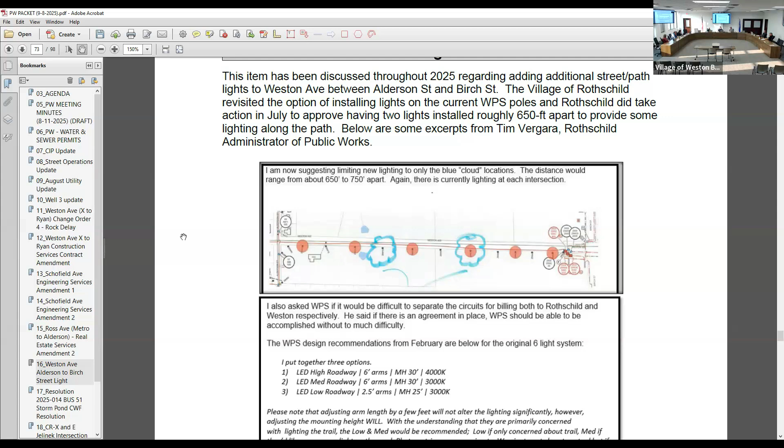Well, isn't it an initial - I read it's like a 2,000 to hook up? They have to get a transformer, and then they need - yeah, so there'd be a transformer in there, what do you say, 2,000? $2,000 to $4,000, so I guess we'd have half of that cost, and then your monthly fee, yeah.

I mean, I get where if you want - I mean, they wanted it and they were cooperative, I guess. The feasibility of it, to me, it doesn't - I don't think it does much. Like you said, it's going to light up a little bit of that low spot there in the middle, and that's it. So I think we had maybe, like, I understand that design, but I think we had a different design months back, which showed the light, how far the light went, a lot better.

And if I recall, there was some concern about how much of that light would reach the roadway, and create some issues or whatever, but anyway, any other questions or comments on that? Would anybody like to make a motion as to that item?

Would anybody like to make a motion to that item? I'll make a motion to not go ahead with the lighting. To deny? To deny, okay. Tom makes a motion to deny the lighting plan. Do I have a second? I'll second. Second from Fred. Any other discussion on that motion?

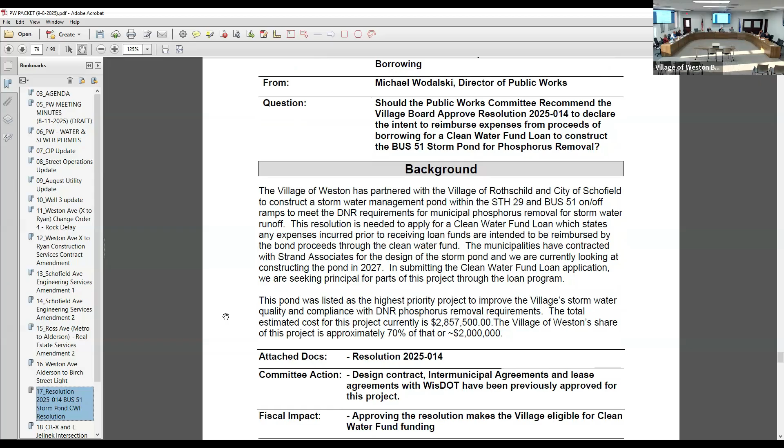Item 17, Clean Water Fund Loan Resolution for reimbursement for the Highway 29 Business 51 Stormwater Project. This resolution is just our part of the Clean Water Fund submittal, declaring that we are anticipating to refund ourselves with borrowed funds from the state of Wisconsin. If we were to receive funding for the Clean Water Fund, any expenses we have on the project would be reimbursed from that. The estimated cost right now is about 2.8 million. Our share of that is roughly 70%, or say $2 million, with Rothschild and Schofield picking up the other 30%. Well, I think Rothschild's like 28% almost, and Schofield's like 2%. The DOT is still looking at their stormwater model, and hopefully in the next week or two they'll be getting back to us to see if they deem it worthy to partner with us on this or not.

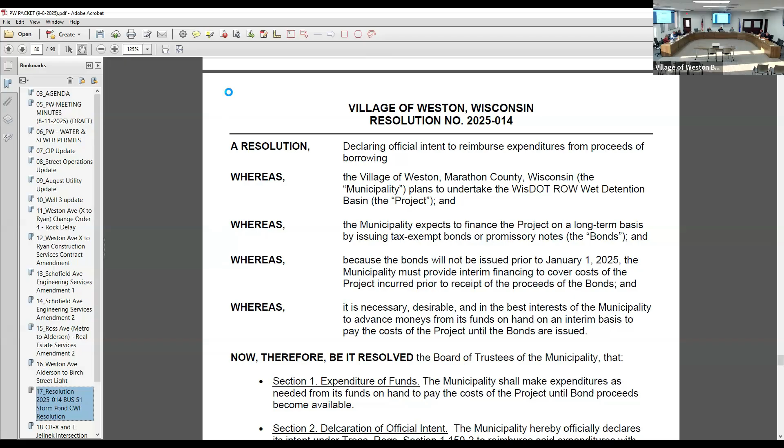Any questions or comments? Otherwise I'll take a motion. I'll move to recommend approval of resolution 2025-014. Motion by Tom. Do I have a second? I need a second. I'll second. All right, I have a motion and a second. Any other discussion?

All those in favor say aye. Aye. Aye. Any opposed? Motion carries. Item 18, East Jelinek at Highway X turning movements.

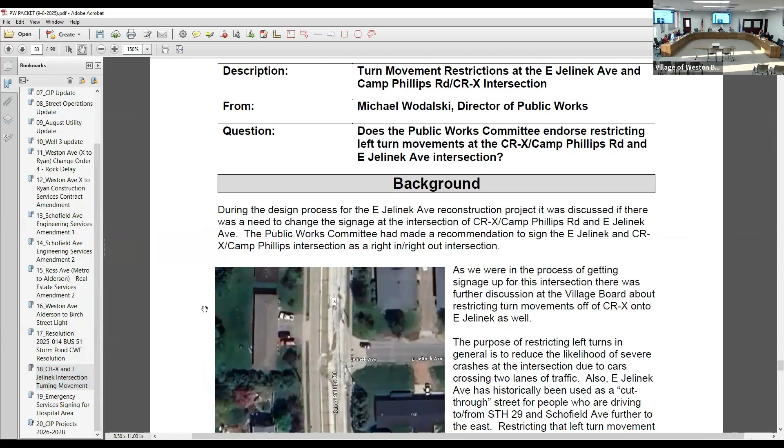We discussed this as part of the East Jelinek reconstruction project a couple years ago, or maybe it was last year during Public Works. It came back up as an item of discussion at the board and was then discussed at the most recent Community Life Public Safety meeting. Was that last week? Yep, okay, it's all a blur. During the project we had discussed restricting left turns to reduce crashes at the East Jelinek and Camp Phillips intersection, as well as trying to dissuade people from using that as a cut-through street.

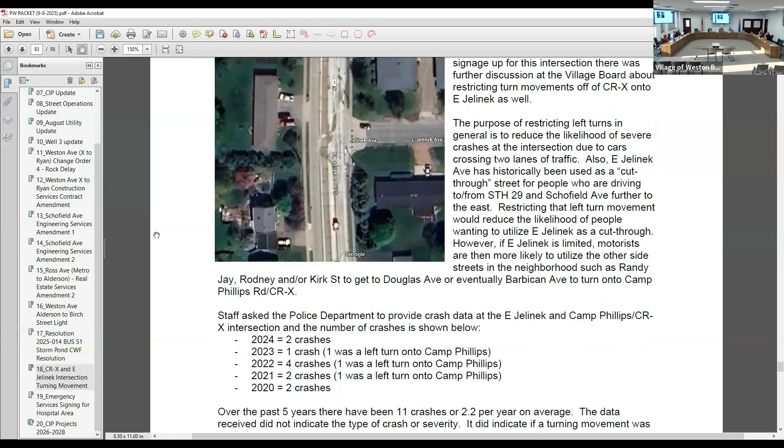We did get some crash data from the police department where it was pretty low. There were 11 crashes over the last 5 years, and 3 of those 11 were due to left turns going onto Camp Phillips Road. So about 2 crashes a year on a side street going onto Camp Phillips. I'm guessing that's probably similar to just about any side street we have on Camp Phillips.

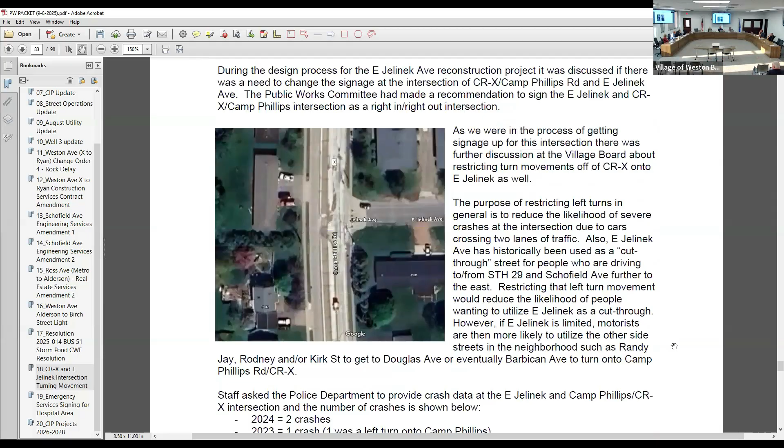I uploaded the wrong one. I had a nice picture from Luis and everything on the one I thought I had in the packet, so my bad on that. That's okay. But there are some pine trees off to the left here that did get trimmed back, and now you can see under them, which I believe was probably a factor in the past about people feeling comfortable pulling out there, because you really couldn't see traffic heading north on you.

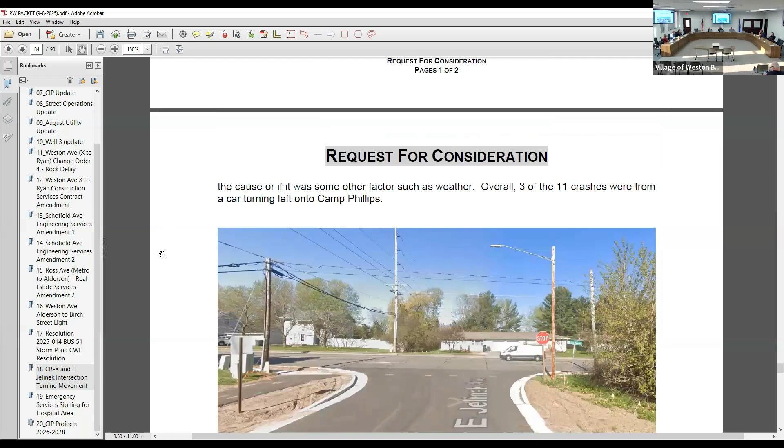The Community Life Public Safety Committee did endorse just leaving the intersection as is, so not restricting any movement, letting people turn left if they want to. Not sure if you guys have any thoughts on reconsidering that.

Just to give some background from my perspective, I was the one that made the motion in Public Works when this originally came up. It was part of our bigger conversation about East Jelinek, and toward the end of that discussion Hu Sheng maybe brought up restricting the movement, and I threw it into my motion. Afterward I reached out to Michael because as I gave it more thought, I'm like, all we're going to do is move the problem. At least from my perspective as a resident who lives right down the street there. When it's busy, myself and my neighbors, we don't go down East Jelinek to turn left because we can go up by Kwik Trip and use the signals there.

But during the rest of the day, it's not an issue. I've intentionally forced myself over the past few weeks to go over there to turn left to see how long it takes me, and then I've gone to a bunch of the other intersections that come off of Camp Phillips, and it's no different at any of the other intersections. You have the same issue when you're trying to turn left and it's a busy road.

Same if you're on Schofield Ave or any other busy street. If we were to restrict left turns, I think all we do is move the problem to another street. People are just gonna go down the block to Douglas and turn left there because they're allowed to. And then we're putting more traffic on a residential street that's not intended for that traffic, rather than on East Jelinek, which is intended for more traffic.

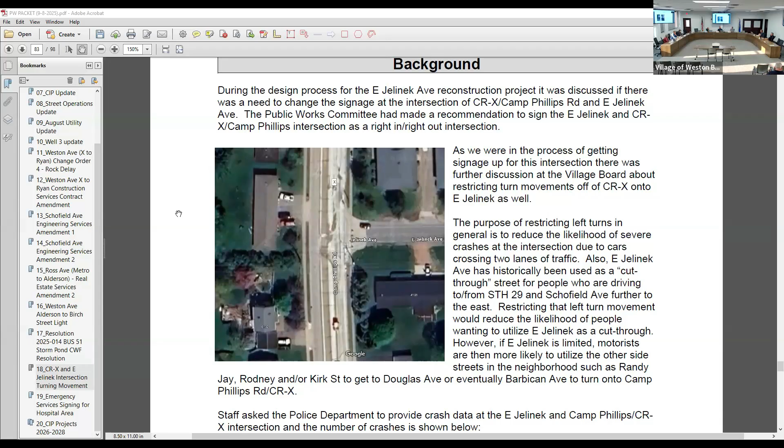So after giving it all that thought, I reached out to Michael, and then it came up in board that we hadn't done anything on this. So we decided to bring it up at Community Life and Public Safety, and I gave the same feedback. Like Michael said, the biggest issue in the past was off to the south there—there was a bunch of trees and you couldn't really see while turning. That's now been trimmed way up so you can see quite a bit that way to make it easier. So that's how we got where we are.

I think a lot of the industrial traffic the other way on Jelinek is doing the same thing. They're now all turning on—is that Von Kanel?—going up to Barbican Ave, because there's a light there. You might have to wait a little bit, but you know you're gonna get out.

From 7 till 8:15, it's crazy trying to make a left turn there, so people have just gotten out of the habit of even trying. And the rest of the day, like you say, it's not an issue.

So there it is now, looking left. Those pine trees used to come all the way to the ground, so we were pretty much blinded. You could maybe see to the post, and anything else after that was generally shaded. Now you can at least see further down the roadway to see what's coming your way.

I would move to leave the intersection as it is. Motion from Fred, I'll second—second from Tom. Any discussion? All right, all those in favor say aye. Aye. All those opposed? All right, motion passes, and then we'll jump to the final item, number 20, 2026 to 2029, capital improvement plan discussion.

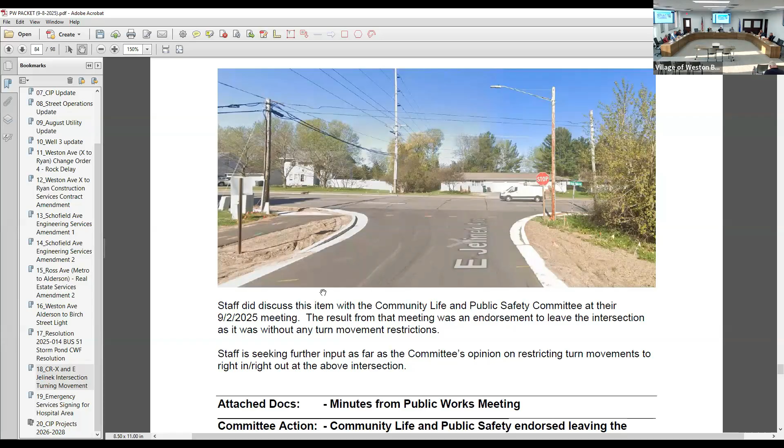All right, well, maybe in October I'll just put nothing else on the agenda. I leave this at the end because I know it can kind of become overwhelming and take over a lot of time on the project.

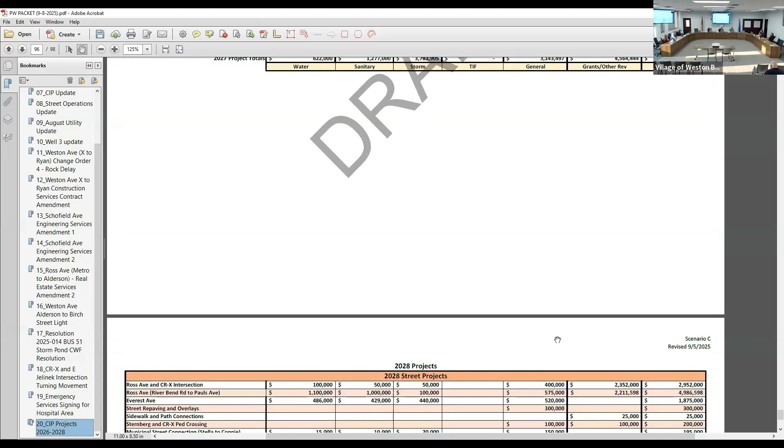I did go through and added in future years—I think the last couple meetings we just kind of did the 2026, 2027 projects. Trying to fill out the table, one of the items I guess I've historically—in 2018, 2019 was kind of the last time I was probably given good financial guidance as far as how much of a targeted value for borrowing in the general fund. At that time it was $3 million a year, so that's really the number I've been still sticking with, trying to stay at or near that $3 million number in the general fund.

So the 2026 number I'm at is 2.86 million. 2027 is 3.14. 2028, 2.37. 2029, 2.92. So that kind of makes it so you can place projects and try to get equipment purchases, park projects, facility projects—all those items that get paid for out of the general fund—figuring out how to partner those, and which years you can look for so that you're creating something sustainable, if that's a dollar amount the board is still good with. That's the last guidance I really got, and nobody's told me no since then.

When we get grant funding on projects, that's kind of a bonus. We can either move that project off, because all of a sudden you get a $2 million project that you get 50% funding on—now we might be at $2 million a year instead of 3 million. So then we can either slide another project up, or we just have a light year that year for funding. Those are always options we have out there as well.

After this 2029 season, it'll be a lot of residential neighborhoods getting reconstructed, primarily west of Alderson Street—that junior high to senior high area, that's where a lot of our asbestos cement pipe is. So getting that water main replaced before it all starts failing on us is going to be important.

Any questions or comments? Would you be looking for a motion this evening? While we're going through budget process, I think it would be good to have some recommendation before we got to the budget hearing where we talked about capital improvement from Public Works. So even if the response is just that we think you're on track, Michael, I think that's helpful, taking that forward to board. Probably one more meeting, one more budget workshop meeting away from CIP, maybe two, but you might not meet again before that would happen.

So would you be looking for a motion to say, move to follow the proposed plan? Or move to present to the board as a recommendation for consideration? I think either would be good. Would anybody like to make a motion?

I will do so. Motion by Fred - do you mind we're simply presenting this to the board as a draft? That's the motion. Okay, and do I have a second? I'll second - second by Tom. Any discussion? All right, motion and a second, no discussion. All those in favor say aye. Aye. Any opposed? Motion carries.

Thank you. Future items - next meeting dates are October 13th and November 10th. Will there be any conflicts with Veterans Day on November 10th? I think we're still open. Yeah, we are. All right, so October 13th and November 10th for the regular meetings.